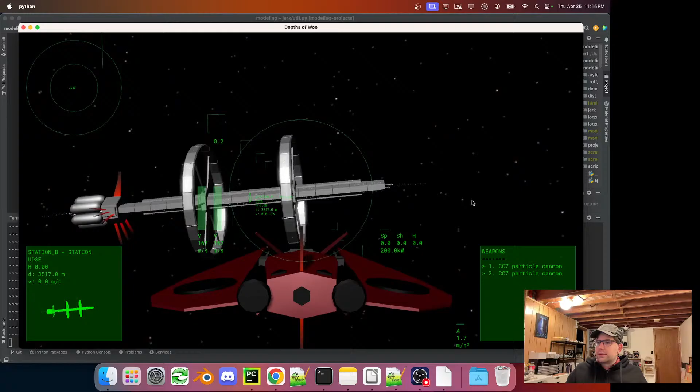So this is the space station, and it's kind of like a tower-like structure with these two rings that aren't for artificial gravity, but are mainly just designed to be a space where a lot of ships could dock around it. The large radius of the rings is so that in each of these segments, potentially a ship that's quite large could dock. You can see there's a docking ring.

And I'm going to clip right through it because that's another thing this is missing is collisions. But yeah, there's a facet here that's quite large that potentially a large ship could dock against. So if we look at this external view, you can see my fighter, which is kind of a large fighter.

This particular fighter is quite a bit bigger than a normal modern fighter plane. It's like between the size of a fighter plane and something like a Blackbird.

And you can see the docking ring for scale, like a standing person could fit through that docking ring. So there's enough space in each of these segments that a really large ship could potentially be parked there in that spot.

So... oop, that's funny, I just had a little crash there. That's fine. So what's missing here?

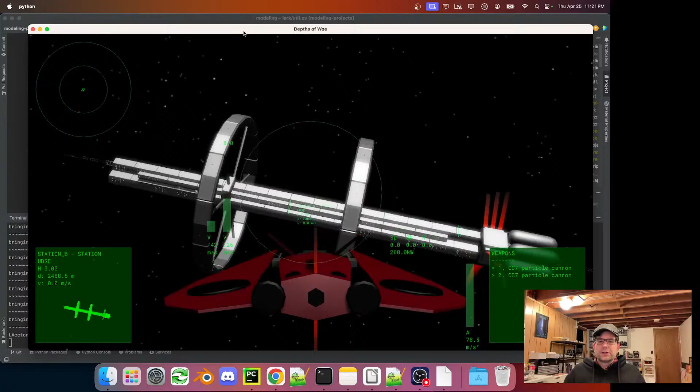I am not an expert designer or anything, but something I'm learning is really important for good designs is to have a mixture of low, medium, and high detail. So in this space station, you can see the low or larger details are the big tower and ring structure, and then maybe some very high detail is when you get very close.

Eventually this would be a level-of-detail thing where these models wouldn't pop in until you got close enough to actually see them. You have these docking rings, which have a lot of very small detail compared to the size of the station. The antennas and this thruster alignment system I'm imagining would be a good medium level of detail, in between in size between those things. And I think that's going to really tie the design together and make it look nice.

So let's get to it. And just before I start, I've been really getting into trying to sketch out designs on paper before I model them. It really, really helps. I used to just try to dive right into the programming, but having designs is really helpful.

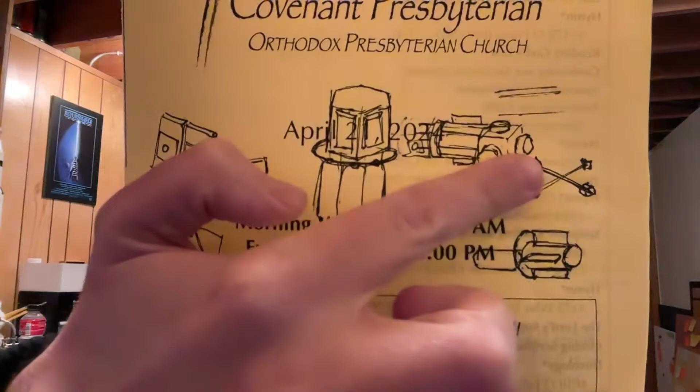So here's just a little sketch that I made on my church bulletin. This is like the end of one of these arms—you can see there's 4 sticking out. We have a little cluster of these thrusters, and then this is a little piece that has some radiators sticking out. These aren't going to glow.

They'll be dark, but I think the idea is those radiators are either for waste heat from the thrusters. They're going to be quite large, so they would maybe generate a lot more heat than a spacecraft's thrusters, so they need their own radiators. Or you might think of them as radiators for a backup reactor system. Depending on how things look, I might try to bake that into the design.

Another piece of detail I had here, an idea too, is kind of like a circular heat shield between the main radiators on the space station and the fuel tank. So I might try to add that as well. We'll see how far we get, how all this looks. I think we'll try to get this thruster system going and see how it looks on the design and go from there.

So let's see where we are. I usually use this bench script as a way to just run the piece of whatever I'm currently working on. So you can see right now I have it running the code that generates the space station, and then after it runs, I scale down the parts and open them in Blender so we can view it in Blender too.

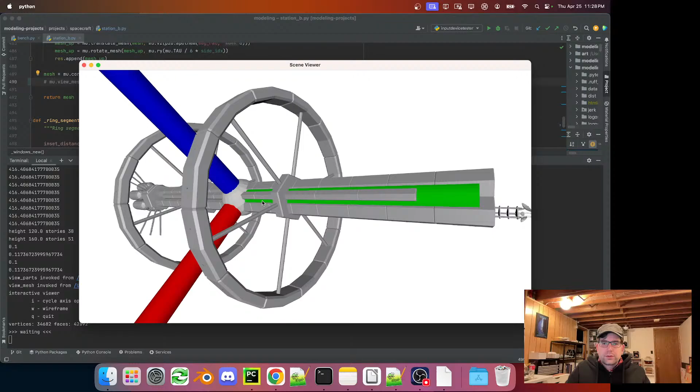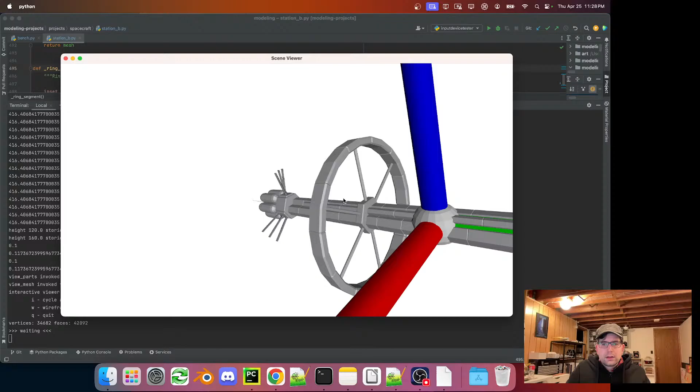Let's just quick, I'm going to run this again and disable those other views, because we're not working on windows anymore, so we can turn these off. And this should, yeah, the whole thing should run pretty quick. Boom. I had a different method for generating the windows before that is more capable, but in this case wasn't really needed, and that was slow. With that rewritten, you can see it takes just a couple seconds, if more than a second at all, to generate this model.

And it's not a single model, it's a hierarchy of models. You can see all of the detail in it in the wireframe here. Okay, so let's work on these thruster pieces here. I'm gonna scoot in.

I've been trying to practice using the keyboard more in my work, so I'm gonna take this as an opportunity to practice that a little bit. Just doing a little bit of cleanup here.

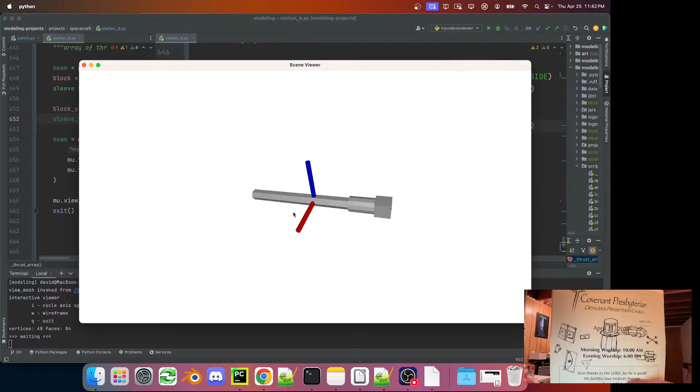Oh, simple mistake. Okay, now we've got an inhomogeneous shape. Oh, I've already got these here. Don't need those. Okay. Oh, I need to subtract. Oh, this needs to be divided by 2. Okay, yeah, so you can see now how this is looking something like this piece right here.

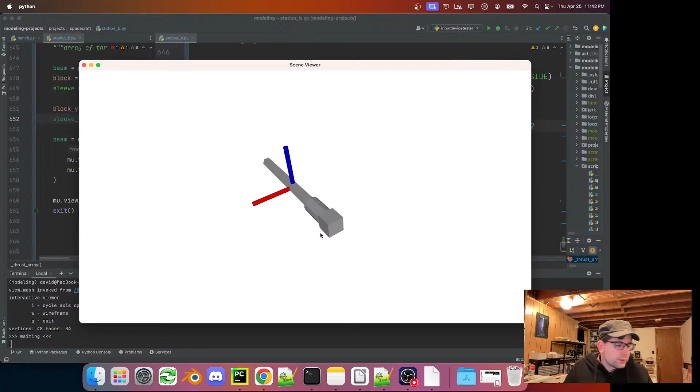I think what I'll do is make all of the rings together as a separate piece so we can make those a different color, but we don't end up cluttering this up with too many different parts. Then we can adjust the sizes and level of detail once we can see everything in context.

Alright, so let's do the rings, and then we can add the... oh, and I think I was picturing a little heat shield there too.

I started thinking about this, like if you have radiators, even if the majority of the heat is coming off one side, if you have other components off the end, they should be shielded somehow. I find it very helpful to think about the functions of things because it almost always yields more interesting designs. I'm not interested in making designs where I'm just adding random detail. I'd rather have things look simpler.

And have the detail come from things that appear to have a purpose. Fictional world, nothing's perfect, but it's good to have things look functional, in my opinion. That's my philosophy as far as design goes.

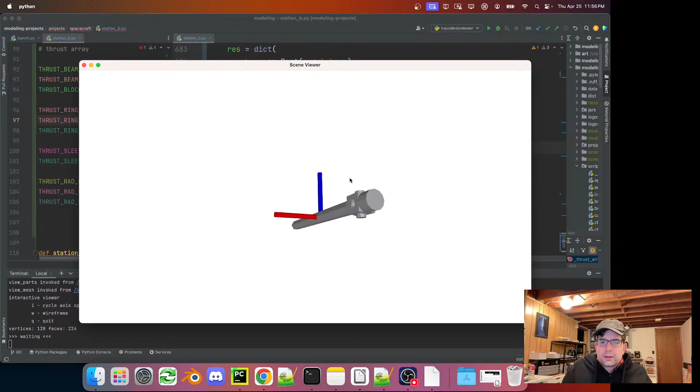Almost. Okay, so it looks like the only thing that we have is that we just have the sleeve and the block flipped around here. And maybe the - yeah, so we want - oh, I see what's going on.

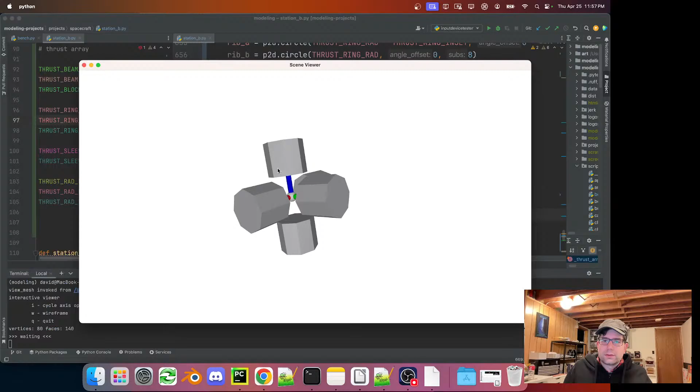This needs to be backwards like this. Okay, and also this needs to be x negative 90 because we want it to be on this forward side. Yep, okay, so that looks good.

Oh, and it looks like, yeah, rib B here. Okay, and I need to swap rib A and rib B around. Get rid of this to do. I think we're close to done here.

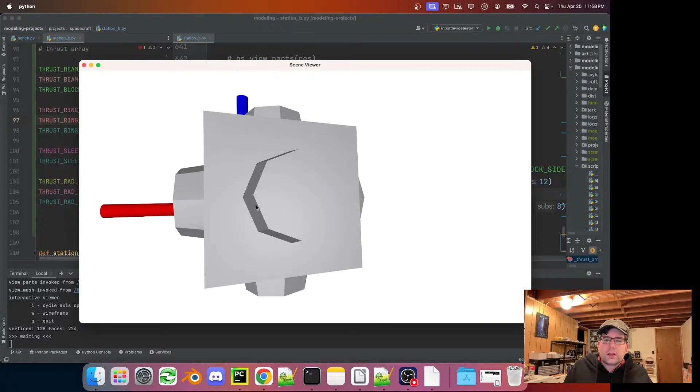Okay, yeah, all right, so that's good. The height is a little bit high, and these also could be a little bit bigger. So here's kind of my reference, but we can tweak.

So the ring height can be more like 1.5. Let's see if that solves the problem. Yeah, that does it pretty well.

And I want to make the sleeve a little bit bigger. So we'll bump it up quite a bit.

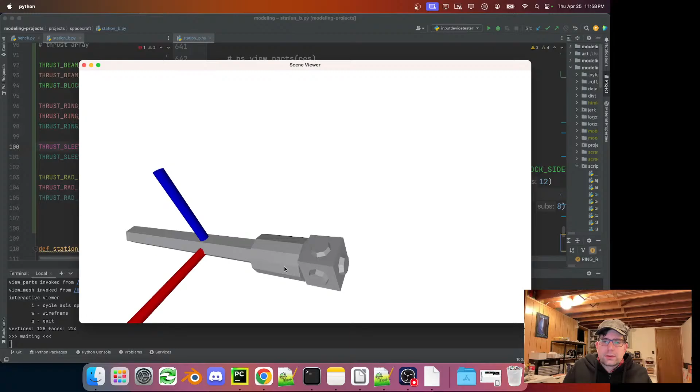There's kind of a science to how you size different parts so that they look interesting next to each other. There's some mathematical rules kind of dealing with relative sizes that I should probably be employing here, but we can kind of eyeball it.

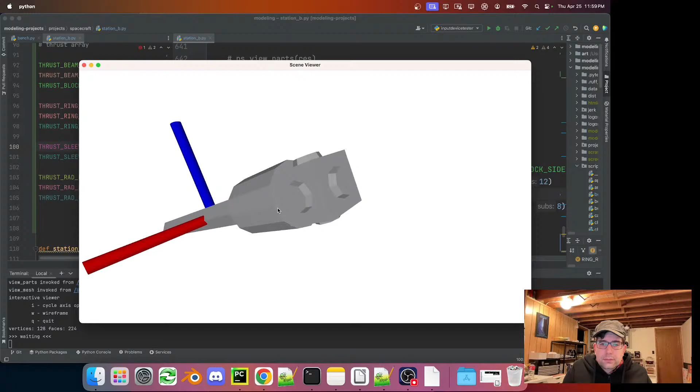Yeah, and I don't think I want to add a heat sink here. I think it's going to be enough detail as is.

Okay, so now we just need to add the little radiators to the sleeve. Yeah, sweet. And does this spin in Y? Yeah, okay, cool, I sometimes forget which parts I have.

So sleeve rads low equals mu dot spin rad low for 0, and then we just need to come up with rad low, which is going to be a box mesh with these things. So our x coordinate is going to be the width out, y coordinate is going to be the length, and the z coordinate is going to be the thickness.

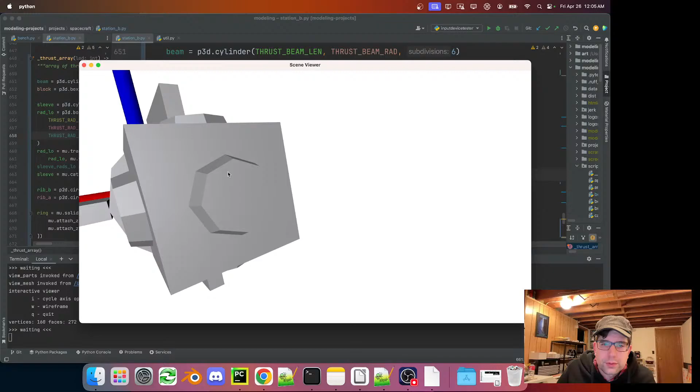That was just 0.1 meters because these things are pretty big. They've got a radius of 4, so they're like 8 meters across. Pretty big, I think we might end up reducing the size of this guy a bit. We'll see.

So we want that overlap to be bigger, we'll do a quarter meter.

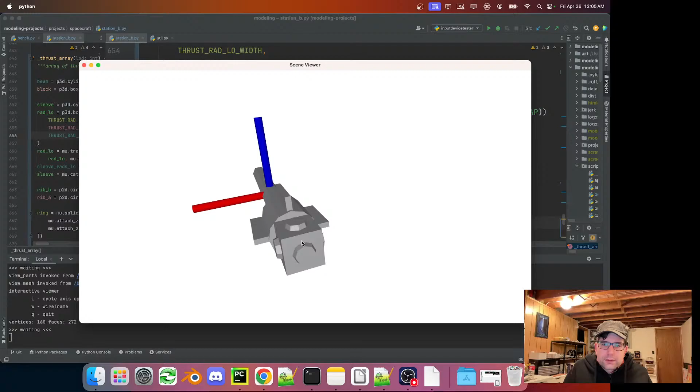Okay, yeah, and these are also too thick. They should not be that thick. They should be like that thick.

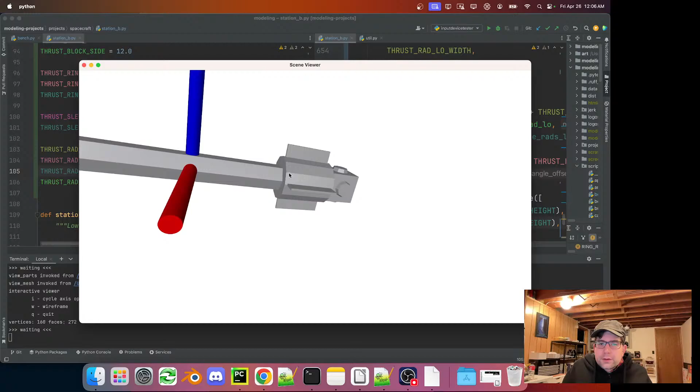Cool, and then do we have the other details that we want? We've got a little gap here, and we've got a little gap here.

I think I'm going to splurge on some extra vertices and make this block have some little bevels in it. So instead of this, we're gonna do a rib that is a rect 2D of...

I think, yeah, just gotta repeat this, and we'll parameterize that too. Something like 2 meters. Boom, yeah, that's it.

Okay, so now u dot bevel polygon chord rib, thrust block bev. Okay, now we can do the same thing that we did here below, where we build the block with the little offsets. So solid from ribs, triangulate.

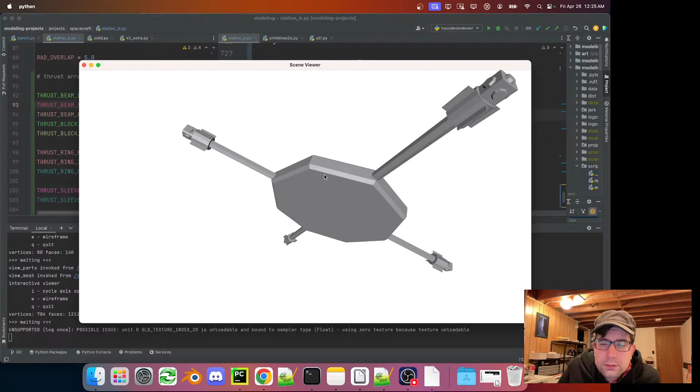Yeah, and you know what, this is actually not very far off from the scale that I was imagining, if this centerpiece is indeed the right size.

So let's attach these things and see how it looks. So now we can just return this part set from here, and we can go back to building the whole station in our bench. So we can get rid of this, and actually, yeah okay, get rid of this.

Now in here, we have to add in our thrust array 1 and 2. Thrust array equals thrust array LOD. Okay, yeah, why am I not passing LOD into here? That's a good question. I think I can do that. And then we're just doing the same thing here where we're adding a prefix.

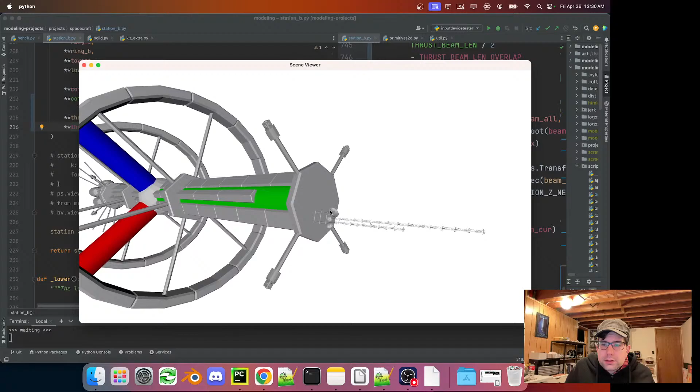Whoops. So thrust array root, vy of y, like that. Let's take a look at this now. Yeah, look at, there they are. That is pretty much what I was expecting. But what we'll do is bring them down a little bit, and we can actually make that plate a little bit smaller too, that they're on. And I think I want...

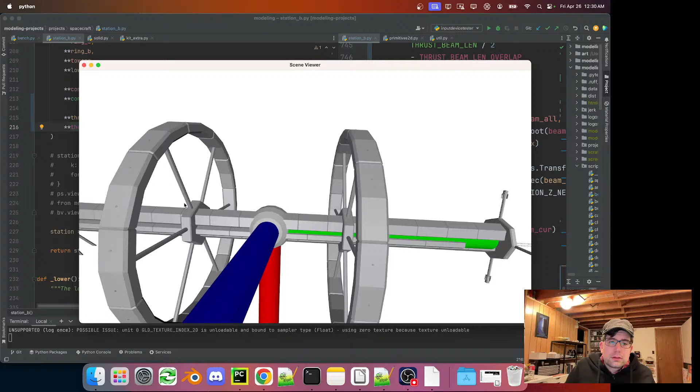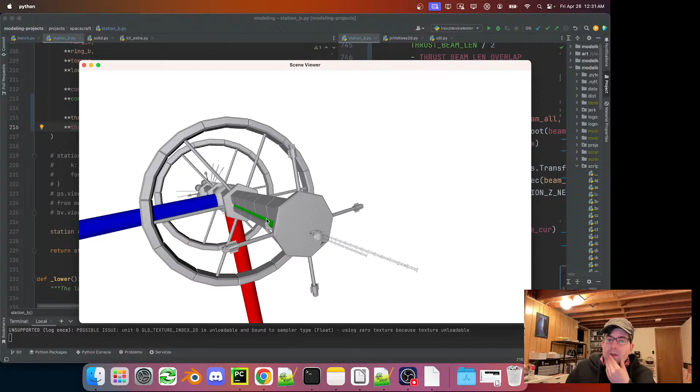You know what, just looking at this, I thought it would be cool to have 4, but I think 3 should work, because we would still get the degrees of freedom, and then I can align it so that it's not lining up with the radiators. So let's do that. And first, it's just fun though, because this is the great thing. I can basically decide however many of these things I want, and it just happens instantly. I'm gonna get rid of this guy. So we're done with that.

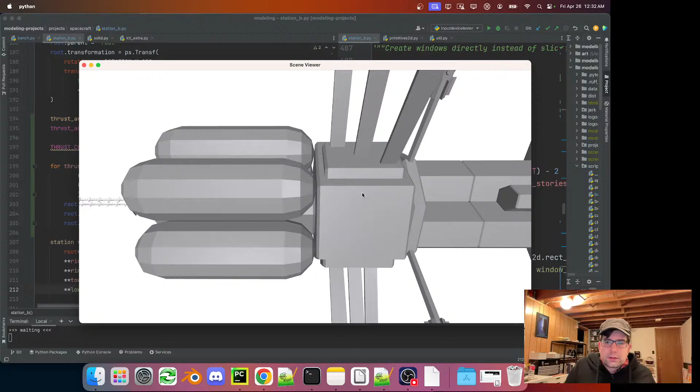Okay, so yeah, and then we want to actually subtract half of the thrust center length. We want to add half of that here. And subtract it here, plus some overlap. Some offset, which we'll just define right here for now to be like 1, 2.5. Just make sure that this works, yeah, because then that way, oh interesting, we've got a little overlap there.

We'll bring that into Blender and look at what's going on. It could be that I'm not actually constructing this right, the right length. Center len plus. Oh, I want to add the offset here. Oh yeah, that's the problem. Okay, so here I don't want to have an offset. Here I do want to have a slight offset, and it shouldn't be even this much. It should be like this much.

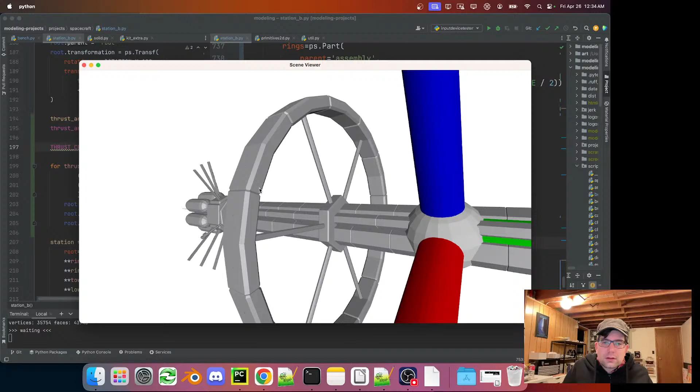Okay, so now let's make three of them instead of 4. So that's just as simple as doing this, and then we'll tweak an offset if it doesn't line up right. Oh, and we gotta do tau divided by 3 here, and we want to add tau divided by 6 times index.

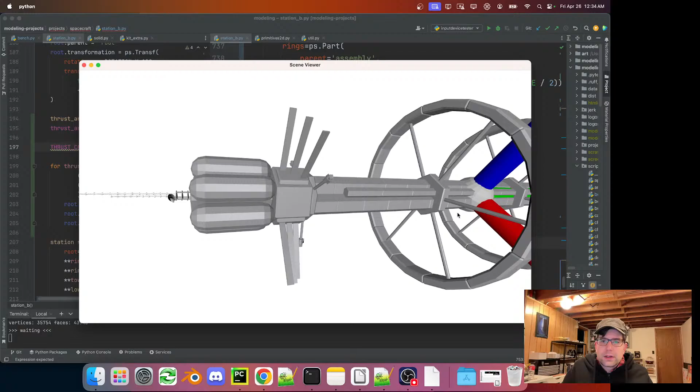I like to use tau instead of pi because it's easier to reason about whole revolutions for angle offsets. Radians, of course, are superior to degrees, but sometimes it's easier to think about things in terms of... now I'm all horsed up.

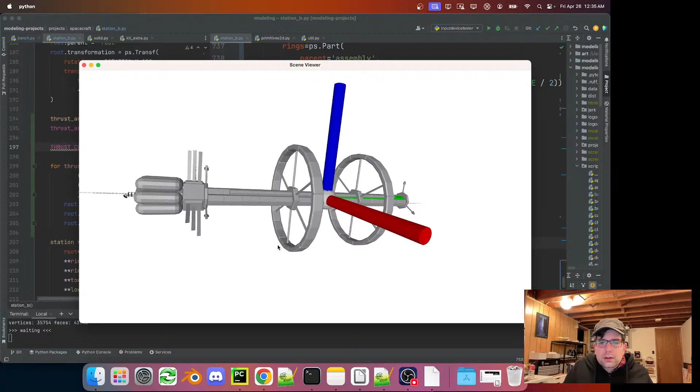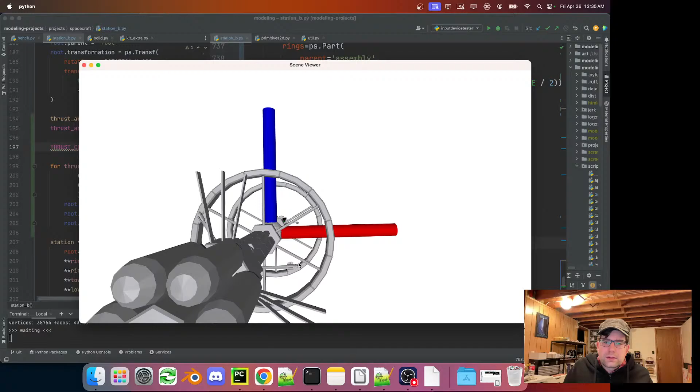Okay, let's just start with no offset and go look. We'll look at this more carefully. I'm missing something obvious. Okay, so with no offset, we have this aimed right, this first one aimed right down the x-axis, and we want to pivot this up so that it is... that not tau divided by 12? 1, 2, 3. Plus math.tau divided by 12.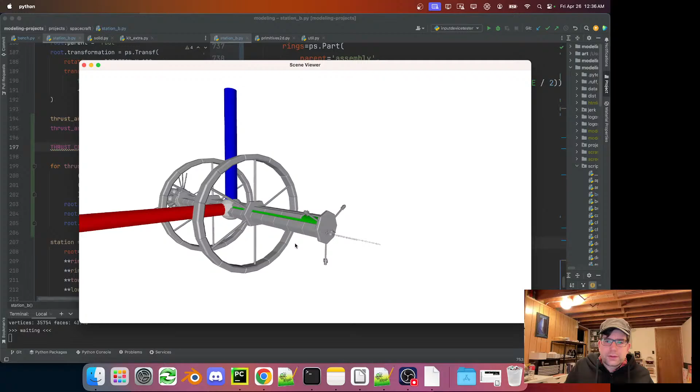Maybe I just wasn't looking at it quite right. Oh, that's right, it needs to be minus. That makes sense. Yeah, there we go. So now these things aren't lined up with the radiators. They're offset. That looks really good.

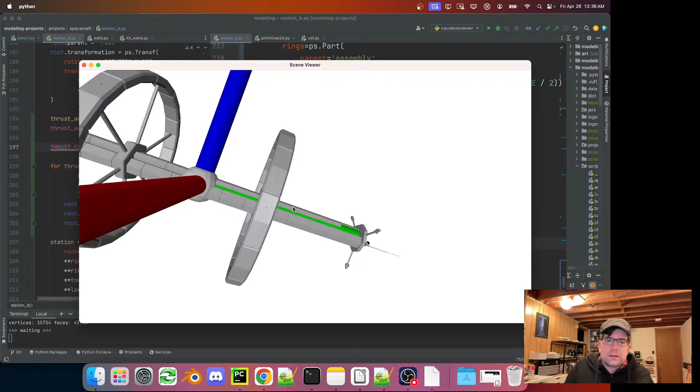And then can we make this smaller? Or yeah, here's an idea. Instead of making it 6-sided, we could make it 3-sided. What we want - so the interesting thing about this design is it has this kind of odd bundle of towers shape.

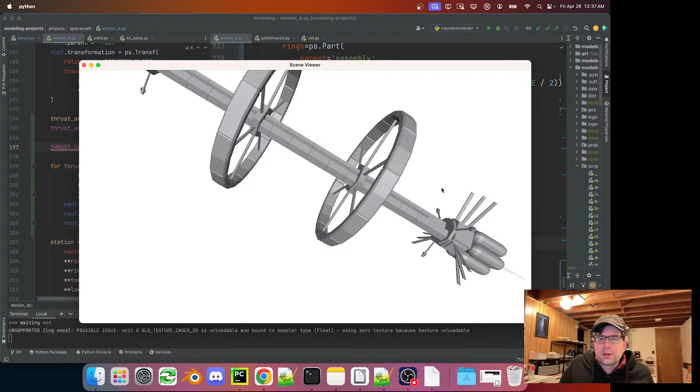Maybe I do want to actually have this accumulate into the total length of the station beyond these final segments. Yeah, that's probably would be better, because then that would give me freedom to make it smaller. So let's do that, and then we don't have to worry about these offsets either. So let's take a look at doing that, and then we'll probably wrap up, because we've kind of gotten this to be where we want it.

So here, this will be minus this. This will be plus this. Tower len by 2 plus thrust center len plus this on this side, and tower len divided by 2 plus thrust center len on this side. And let's take a look. I think that's it, because then we should see the complete segment with its bevel in here. Yep, that looks right there.

And over here, oh, our lower offset needs to be increased. So tower len minus thrust center len.

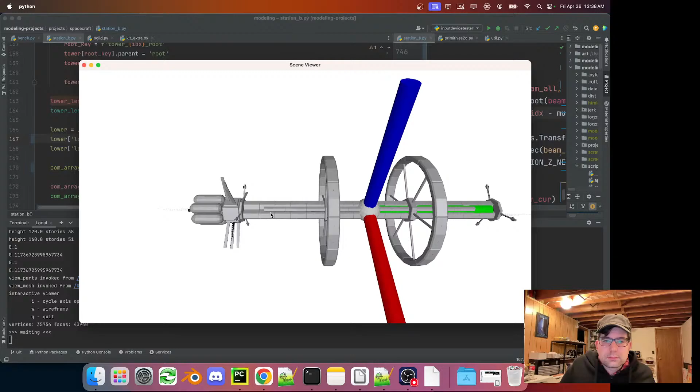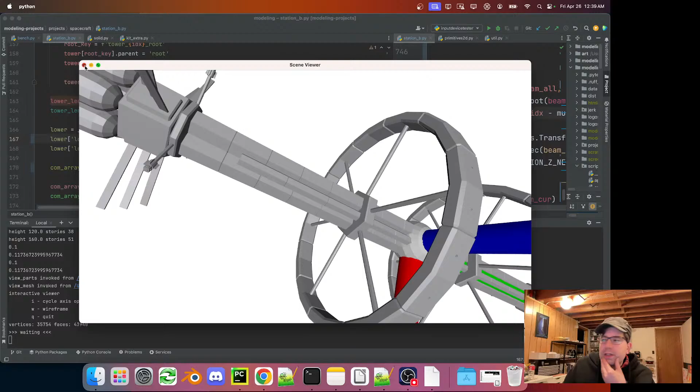Yeah, look at that. And you can see the bevels there. Beautiful. Now we can basically make this any size we want. So I want to make it 3-sided rather than 6-sided, just for some additional interest.

So let's do that, and we'll give it a bevel. Center bev, we'll give it a 20-meter bevel.

So originally we just had this. Now we're going to have a 3-sided thing of that same radius, but give it a bevel. mu dot bevel polygon of rad thrust center bev. And then we're going to want to rotate this to match that negative tau divided by 12 rotation that we gave the beams.

Is that what we want? Yeah. And we could calculate out exactly what the radius of the middle of that beveled face that we created is, but I'm not going to bother. I'll just adjust it with the overlap to make it line up.

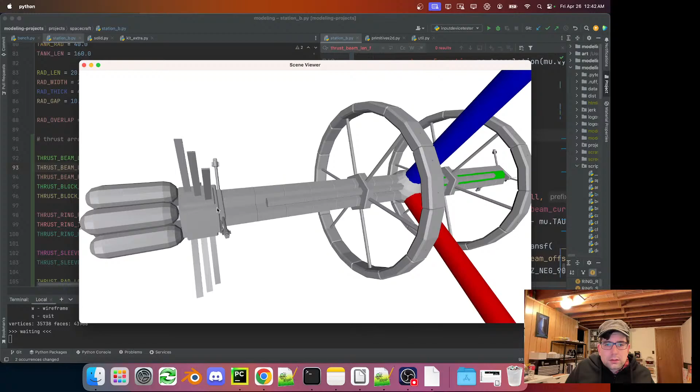That is almost right. I think I want a bigger radius on the center now, and I also want a bigger bevel. So this is going to take a couple iterations to get it right.

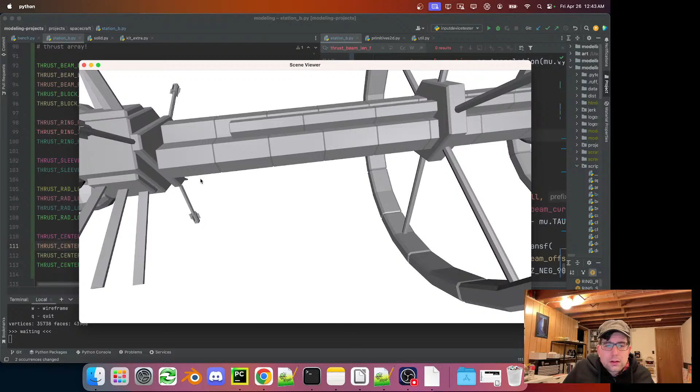Huh, no, that doesn't look so good. What am I picturing here? Let's see how it looks on this end.

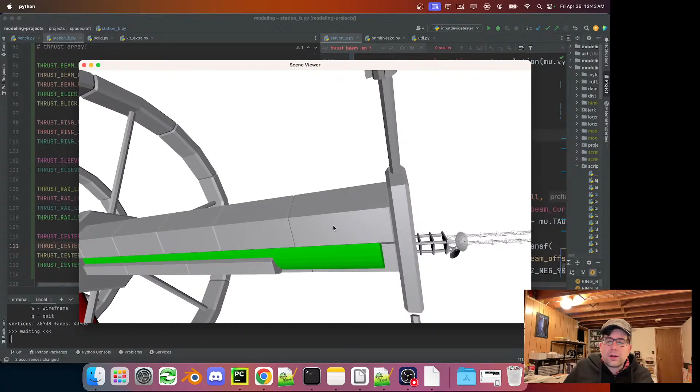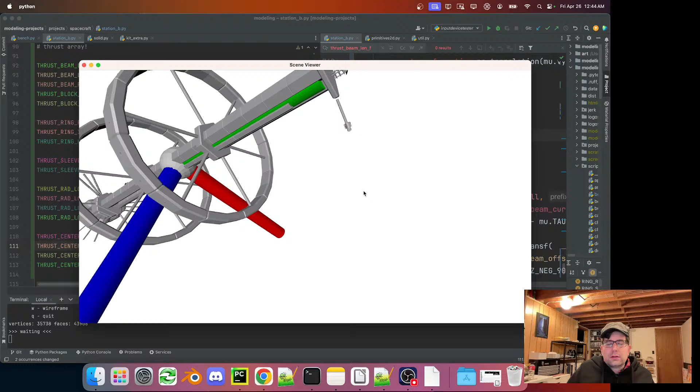It's almost like it needs to be a lot smaller to not look weird in relation to the tower structure. But it looks a little bit weird to have this piece that's smaller than this kind of going into this bigger bottom section. It doesn't look so weird up here. Maybe it does look weird up there too.

Let's just try something here. Let's make this a lot bigger and this a lot bigger, see how that looks. I just don't want too many of the same kinds of repeated shapes stacking up.

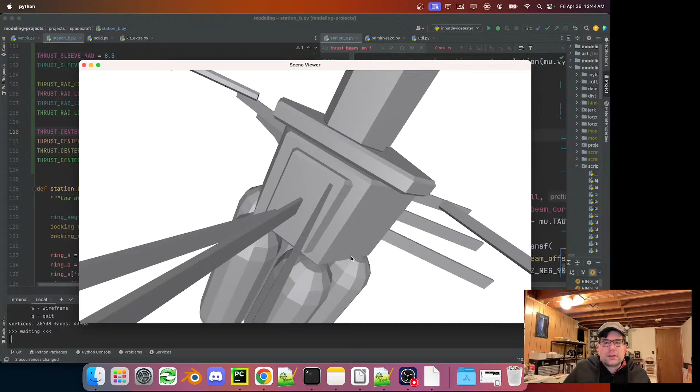Honestly, even these repeated bevels here look a little bit gnarly. And that's too big too. Okay, I take it back.

We're going to go back to the original design for the center, and I will think about it and see if I can come up with something better. But I think this, yeah, this was good. I think this is what, like, 90.

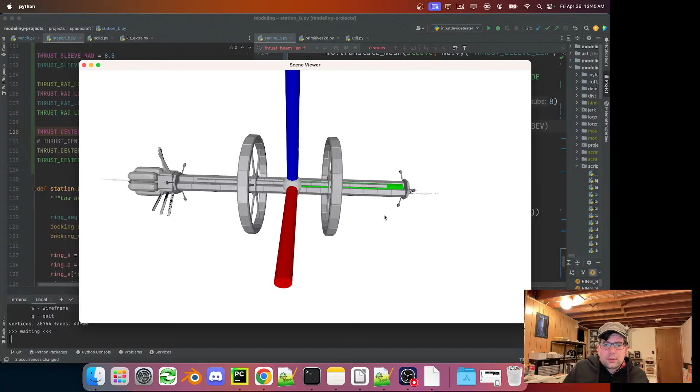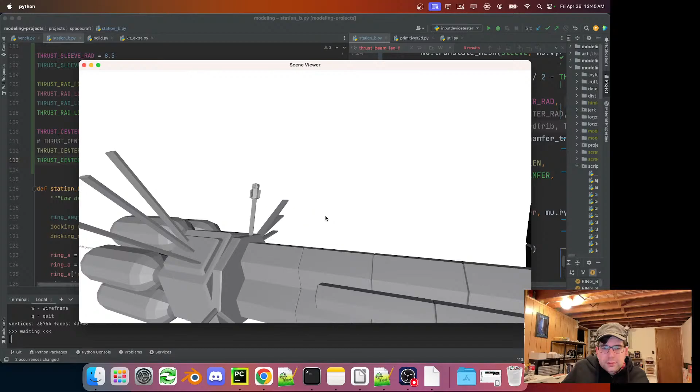That looks better. And what I'm going to do here too is I'm going to put a tighter chamfer on this. So we're going to do 2.5, just for some visual contrast between. Yeah, that's starting to look really good.

Okay, now one issue here. I'm just seeing this. Oh, I need to adjust the number of sides too. We're still doing 8. This needs to be 6.

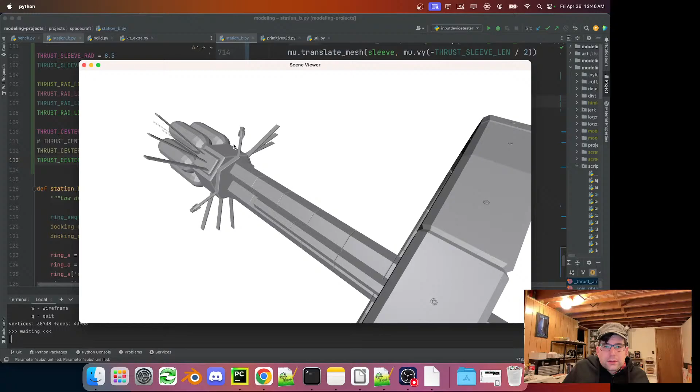Yeah, and I think here it's kind of a contrast how, in these other spots, we have the spokes going into flat sides. Here we have the spokes coming out of corners. So that's a little bit of contrast.

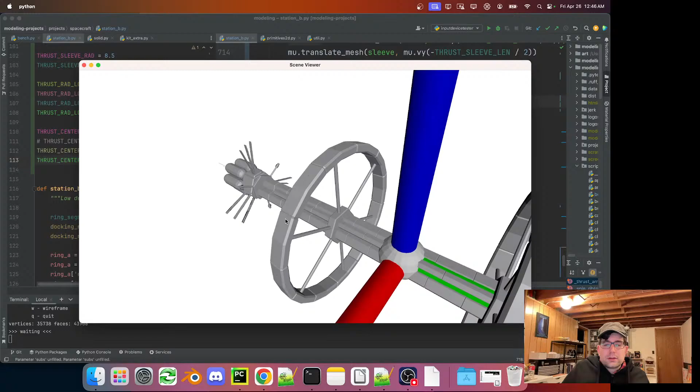And you know what I could actually do here? Could I add a little, I could add a bevel on those corners too. That might look good.

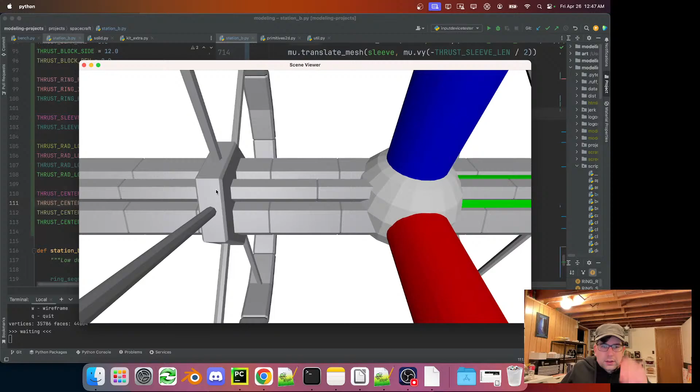Yeah, now that looks nice. That looks good. Just be a little bit bigger. And then, see, this kind of goes with sort of another level, another kind of higher, like a mid detail piece, because there ends up being more sides and more bevels here. It's smaller compared to this.

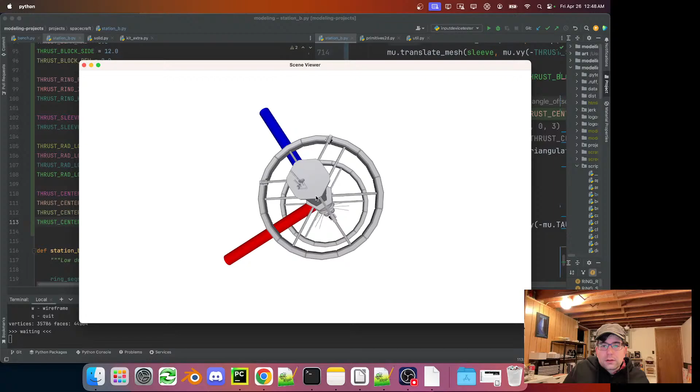I could actually even make this bevel here smaller, just to set it off more. Yeah, and then that kind of ends up being a nice thing there. Let me just check where these comma rays are ending up.

And actually, you know what? Just quick, I'm going to do the same thing with these comma rays that I did with the thrust array and with this little loop here. So, for com array

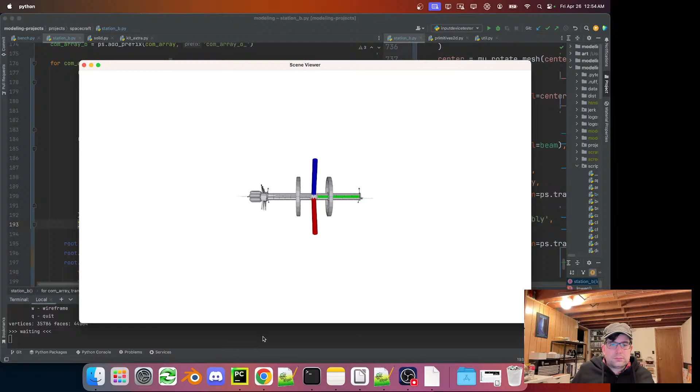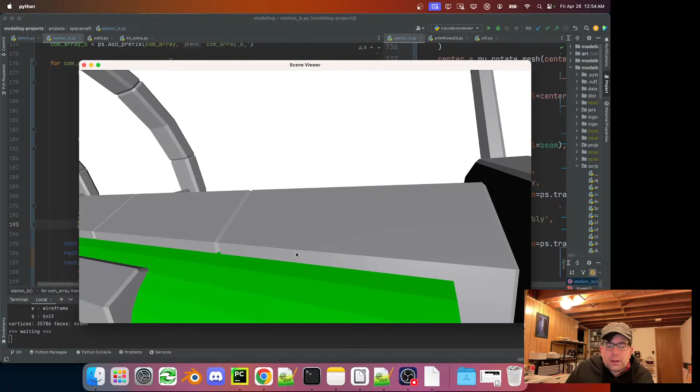Everything still look good? Yeah, I think so, pretty good. This I feel like is maybe too deep in. But I think we've got to look at it in Blender to see if there's an alignment issue. So let's turn this guy back on, and we can take a look at this in Blender.

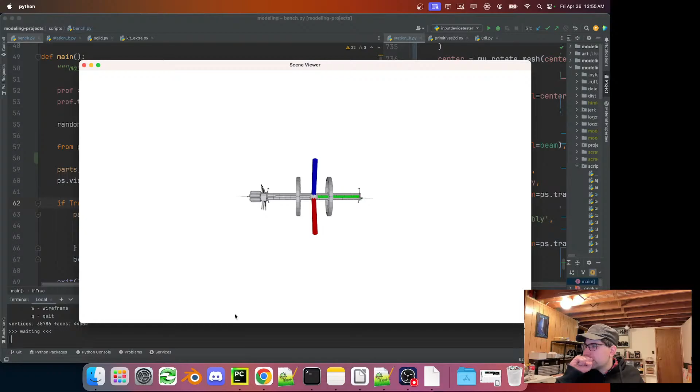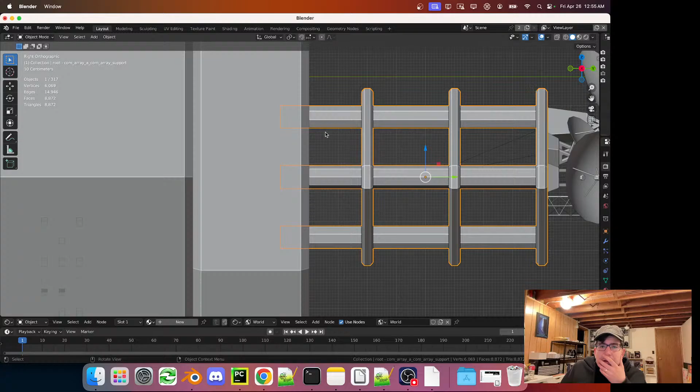Nice thing about Blender is you can get some really nice orthographic views that you can use to check whether parts are lined up like you expect. And you can see we have like that much offset here on that side. I have that much offset there on that side. I think that looks the same here, and you can also measure.

Yeah, I think maybe I'm just incorrectly adding offset here because I'd like these things to sort of have the same story height. Let's take a look and see if we can figure that out, and then we'll call it a night. So let's just measure here.

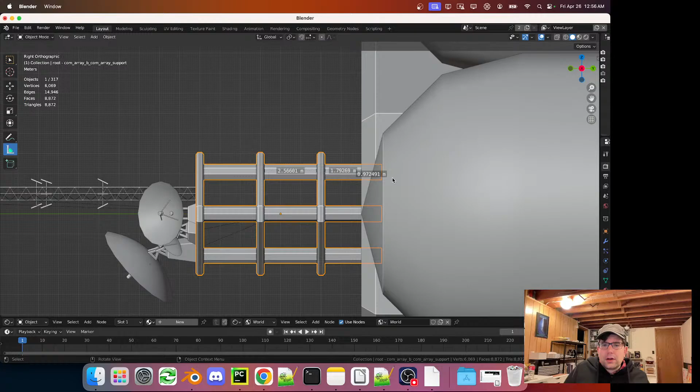Yeah, that's definitely too small. If we go to here, that looks like it's around an offset of about 1 meter, and I think this is scaled by 5. So let's see if this is the same. I suspect that it is. Yeah.

But yeah, now if we measure this distance, that's about 2.5. Is this also 2.5 or is it bigger? No, it's actually smaller. Good. So whatever the difference is between these two, that's how much we actually need to offset, which isn't quite what we're doing now. Otherwise though, let's take a look at the end. See, yeah, and that looks really nice.

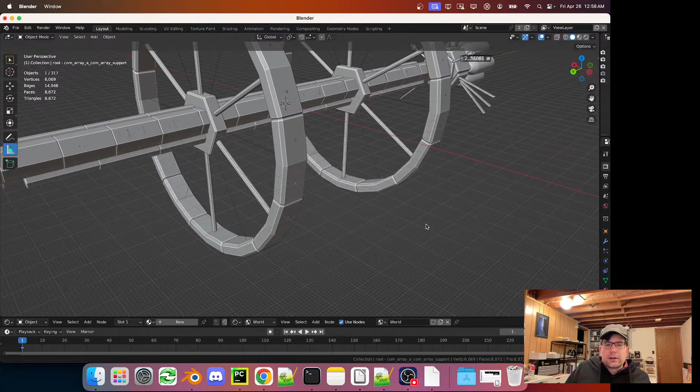Maybe this top one could be turned... no, I think it's fine. It's a long enough way from the rings that it doesn't matter. Cool, well this is looking good. Yeah, let's try to fix that offset, see what's going on there.

So let's actually make this guy a com_array height extra. Extra and upper height divided by 2. We can replace this with height extra. Right? I think so.

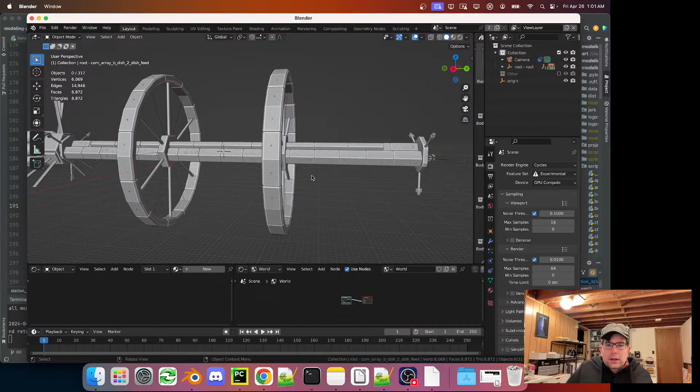And let's take a look at how this looks. Now, I just love this. 1, 1000, 2, 1000, 3, 1000, 4, 1000, 5, 1000. So like 5 seconds we're here in Blender with it. Just love it. And, oh, fail. Oh, we need to add,

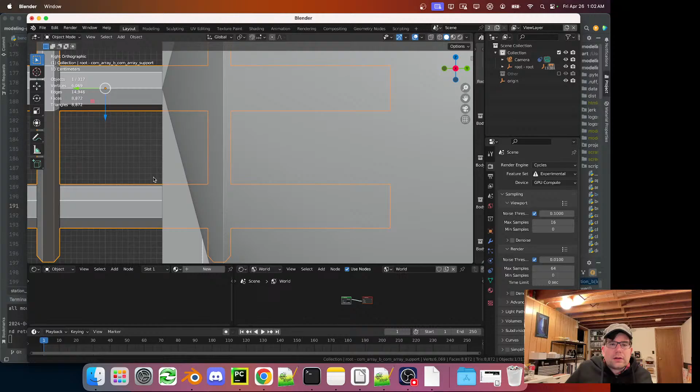Let's see here. It's the same offset issue here on the bottom. Okay, yeah, because the origin is like the middle. Support upper height divided by 2. Support.

Okay, so that's the total, yeah. That's interesting. Something weird is going on here with the way these supports are aligned, actually. It seems like the way it was written before should have actually worked. So I will investigate that, not on stream.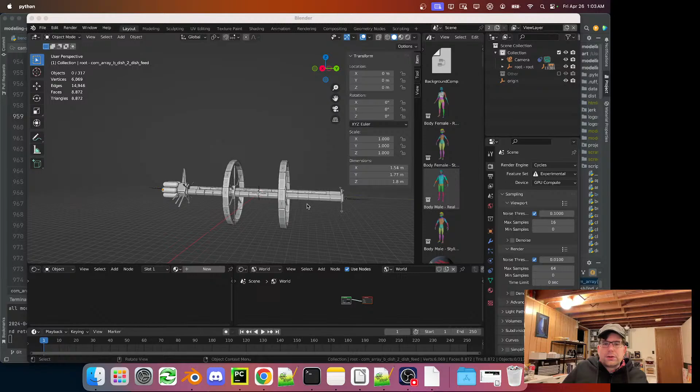But I think we made some pretty good progress here. We have these thruster arrays, and they're pretty much what I was picturing. We were able to make a nice adjustment away from having 4 of them to 3 of them, and it looks pretty good. I'll show it in the game next time, and we'll get materials and stuff on there too. But yeah, some good progress, and I think it works well for that kind of mid detail quality that I was looking for as well. So I think my intuition there was right.